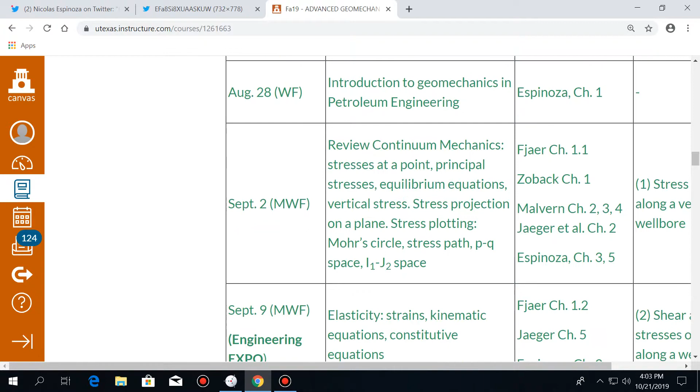Okay, let me talk about a few things in order to get organized. Remember that we do not have a final exam in this class. Instead, we have a final project, okay? For that final project, you are required to do two things. First, you need to prepare an abstract, and let me get over here. So green means that we have already gone through that. You have to prepare an abstract about your final project. So at the end of the semester, you're going to have to make a presentation about this final project, but I don't want you to do that three days before the presentation. You should start thinking about that, and you should choose a project to work on. And I have a few more details about this.

The deadline is going to be November the 13th. And let's go over here. No, not there. If you go to Files, and then you go to Final Project, here you will find the guidelines about this project. Again, deadline is November 13th. And for now, for this day, I just ask you for the abstract, and then later, at the end of the semester, you're going to have to do a presentation, which is going to be about 10 slides. It's not very long, okay? All right.

I have some guidelines about how to write an abstract, and I'd like you to write this abstract as if it were a paper, a conference or a journal paper. And you know, there are some basic questions that you have to answer in the abstract, like just a broad introduction about the problem. For example, if we were to write an abstract about Dr. Hertz's presentation, we'd say something like, hydraulic fracturing has become very important for petroleum engineering in the last three decades, something like that.

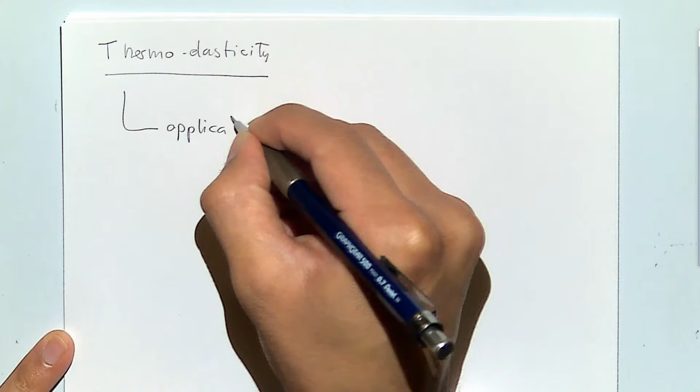And in order to solve problems of geomechanics including variations of temperature, we need to understand thermoelasticity. This is going to have several applications, probably one of the most important being geothermal energy, where there is a lot of effort now being done.

The Department of Energy started investing in hydraulic fracturing more or less in the 80s, trying to produce hydrocarbons from tight reservoirs. It took significant time for that to take off, but now it's very important.

The Department of Energy is also spending significant resources into understanding geothermal energy better. For geothermal energy, some of the rocks are very tight too, so they also require hydraulic fracturing. In geothermal energy, when you do hydraulic fracturing and injection of fluids, it's very important to know what the variation of stress will be due to variation of temperature of the host rock.

There are two types of geothermal energy: shallow and deep. The one we are interested in mostly in petroleum engineering, in terms of producing significant amounts of energy—not just for a few houses but for an entire city—is deep geothermal energy.

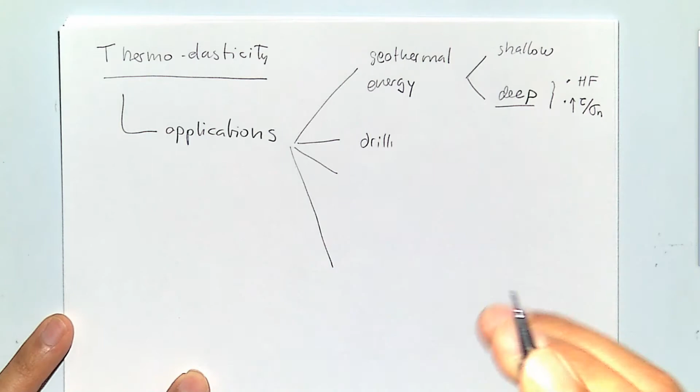Thermoelasticity is also important for drilling applications. When you drill a wellbore, you're using mud, which is usually at surface temperature, and it depends where you are what the temperature of the mud will be. Depending on how deep the wellbore is, the mud will take on more or less temperature as it goes down. But in many applications, that mud will have a lower temperature than the formation itself.

When that happens, you're cooling off the wellbore, and when you cool the wellbore, you can produce an increase of tensile stresses around the wellbore. We'll get back to this. But basically, your hoop stress, because the rock is shrinking, is going to decrease.

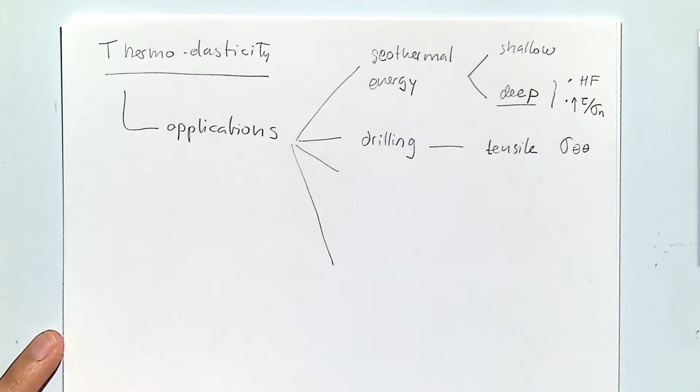There are some examples in which you are drilling a wellbore, and the wellbore is perfectly stable with a given mud at a given temperature. But then you go and do a pass of a logging tool, and some logging tools require the temperature to be a certain value, because otherwise some sensors will not work well. So when you change the wellbore mud, and if you put in a cooler mud, you may trigger tensile fractures, and your wellbore may not be stable anymore—just because of the effect of temperature.

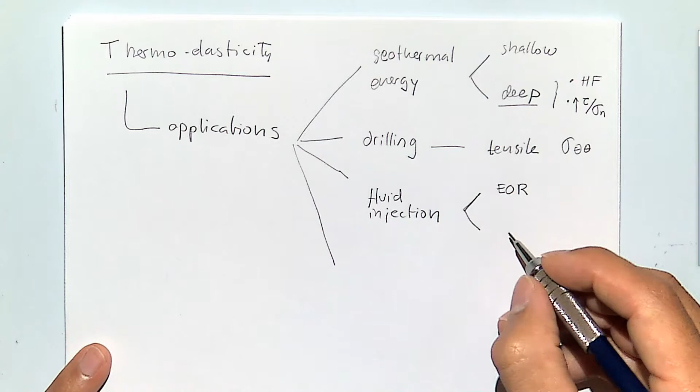This is also going to be very important for fluid injection, in applications like EOR or other pure injection cases. Usually you're also injecting fluids that are at surface temperature into a formation that may have a higher temperature. If you inject fluid into a formation with a higher temperature, you should expect the stresses to change because of the change of temperature.

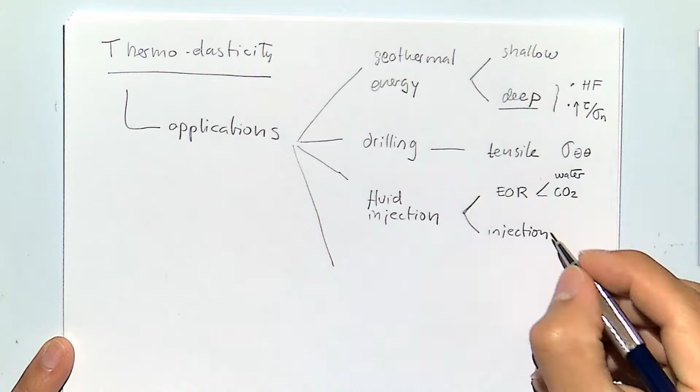This happens with water, but for example, I worked with a student on injection of carbon dioxide for EOR and also for disposal, in which, depending on the temperature of your injectant, you may have more or less variation of in-situ stresses that could help some hydraulic fractures to propagate. We're going to see an example about that later on as we get to the end of thermoelasticity.

But again, here you could also have water, or you could have chemicals. The issue is always what would happen with the contrast in temperature between what you inject and the reservoir temperature.

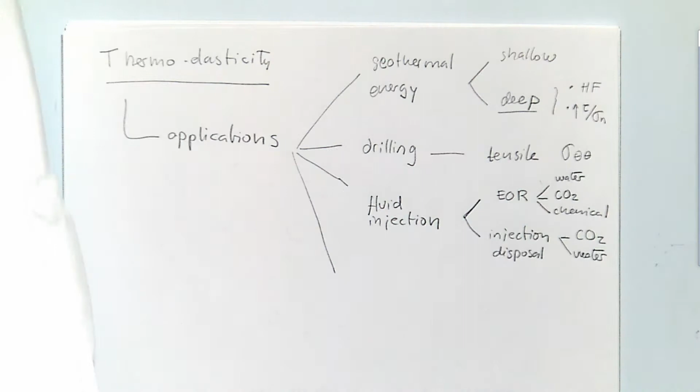Can anyone give me an example in which your injectant has a higher temperature than the formation? Well, but I mean for engineering purposes. Oh, okay, yeah, that would be a natural case. Is it SAGD, like in Canada?

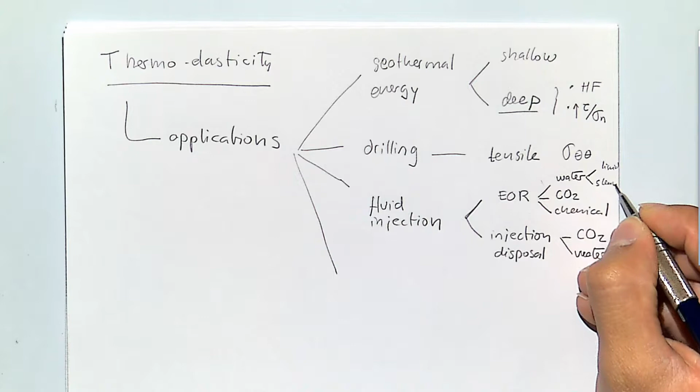Very well. What do you inject? High temperature water—and sometimes also steam. You inject water in vapor phase, and the temperature can be very high, 200°C, 300°C, and sometimes a lot higher than the reservoir temperature, and that is going to cause the opposite effect.

It's going to cause the rock and the fluids inside to dilate. Sometimes the dilation of those fluids, if under undrained conditions where the pore pressure cannot dissipate, will increase the pore pressure, and that lower effective stress will trigger shear fractures.

Can you repeat that one more time? So when you inject a very hot fluid like steam, you're going to heat up everything in the rock—the solids and the fluids. But especially if the fluids undergo a very large temperature change, they may go into the vapor phase, and as they do, they occupy more volume.

They occupy more volume, but you dissipate that increase of pore pressure because you need more space in order to have more volume. But if you don't have that space, pressure is going to increase. Pore pressure is going to increase. And if pore pressure increases, your effective stresses are going to go down, assuming that your total stresses are not changing.

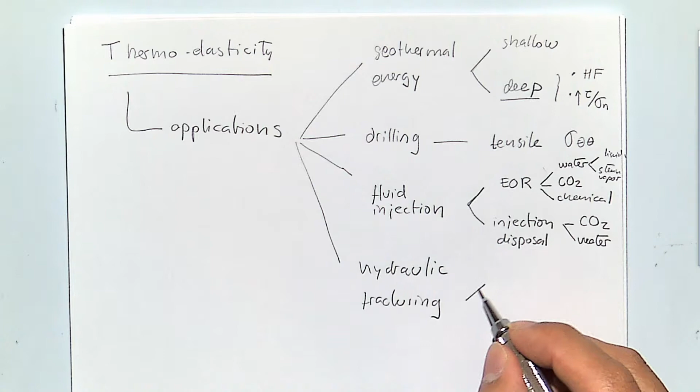All right, and I have a question now for you. Would you inject a hot fluid? Let's just restrict this to unconventionals, and with the unconventionals, I mean tight formations, like a shale. Would you inject a hot fluid or a cold fluid in order to have more, let's say, fracture propagation?

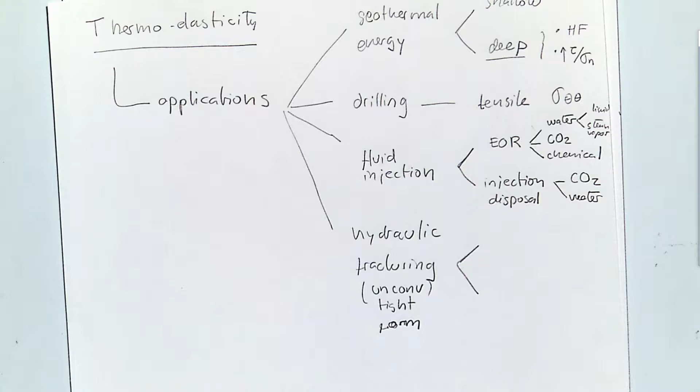Cold? Fracture propagation? Fracture propagation. You know, as we saw in the seminar before, many times you want to increase the complexity of your fracture to have more surface area and to help the fluids to go into the wellbore more easily. So would you inject a cold fluid or a hot fluid?

Okay, let's go with the cold one. Why? Because tensile failure, and you can get profit in something that's opening like that. The colder the fluid, the more contraction you will induce in the formation, and that sometimes can cause additional tensile fractures in addition to the ones that you're causing with the fluid.

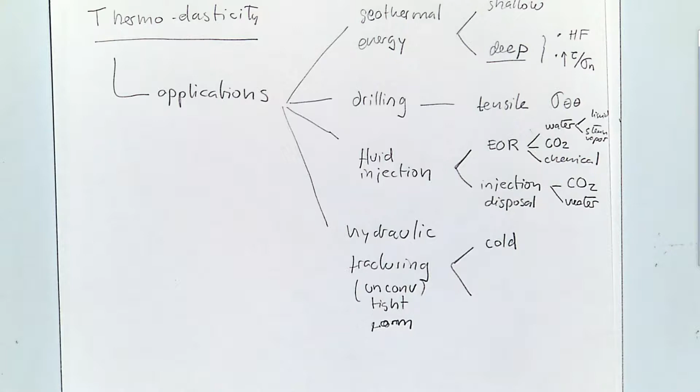There is actually a project that some people have proposed to do cryogenic fracturing. Basically, what you do in this case is you inject liquid nitrogen as a fracturing fluid at very low temperatures so that you can lower the temperature of the formation, and that can help fractures to propagate.

The problem with that is that there is a finite heat capacity of that fluid to cool the rock. So it does help, but the question is, how much?

And although by propagating a fracture by pressure, you have almost, let's say, an infinite source of power on surface on your pumps, when you inject a cold fluid, all the budget of energy that you have in temperature is the heat capacity of your fluid. That's it.

So some people have tried and argue that this can help hydraulic fracturing. It does help. The question is, how much, and again, if it is economical or not. But it does help hydraulic fracturing.

Can you explain that cold fluid is more contraction? We'll go into equations right after this introduction, and we'll see how that happens. But for now, let's just keep it as the high-level introduction.

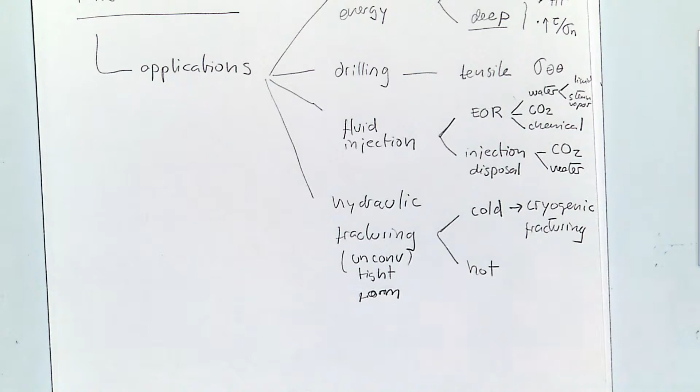And let's go with the opposite. What about if you were to heat up the reservoir? We just mentioned that earlier. So what is going to be the consequence? But now this is going to be an unconventional, right?

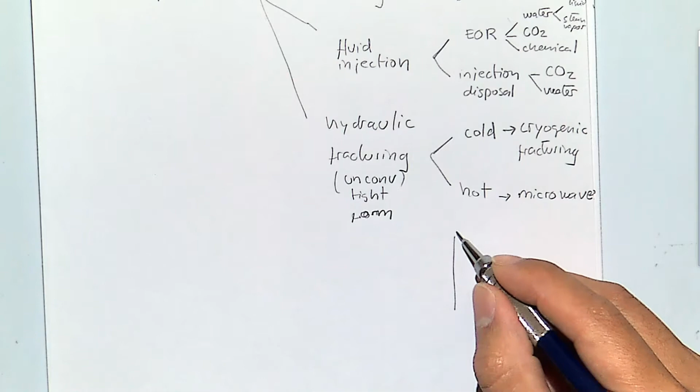And in this case, there are some people that have proposed to microwave the formation. So you heat it up with radiation, and the objective is that if you have a rock with water in the pores, as you heat it up with a microwave, you're going to increase the temperature of the fluid molecules.

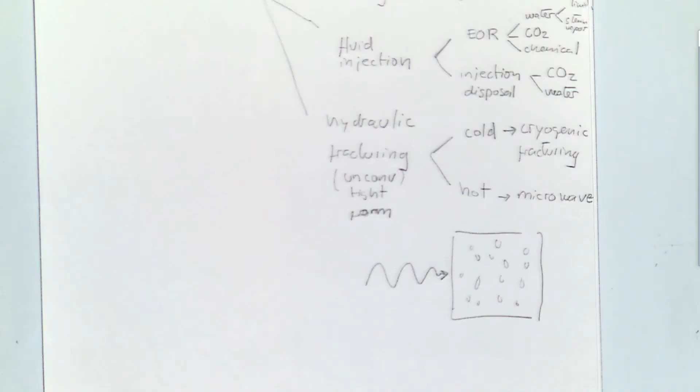Those fluid molecules may go into, I don't have blue color, they may go from the liquid phase into a vapor phase, and as they do, again, they will try to expand. If the permeability of the rock is low, the fluid cannot go anywhere, and if the fluid cannot go anywhere, that means that your pressure is going to increase. And this is again undrained loading, because the fluid is not going anywhere.

It's just changing phase, and as it changes phase, its pressure is increasing. And when it does that, the argument here is that you could create some fractures out of these pores and create microfracturing that is going to increase the matrix permeability of the rock.

I'm not sure, there have been some field trials of this, but people from Aramco Services were pushing this idea. Again, one of the problems is how to get all that energy further away from the formation. Probably with this method, you can heat up very well the near wellbore region, but getting further away, it's very difficult.

Similar to this, it's a process of undrained loading with source rocks. When organic matter transforms into oil and gas, usually also you require more volume for the same mass, and also that can crack some pores in unconventionals when they are forming, which is similar to this, but in this case will be caused by radiation and increases of temperature.

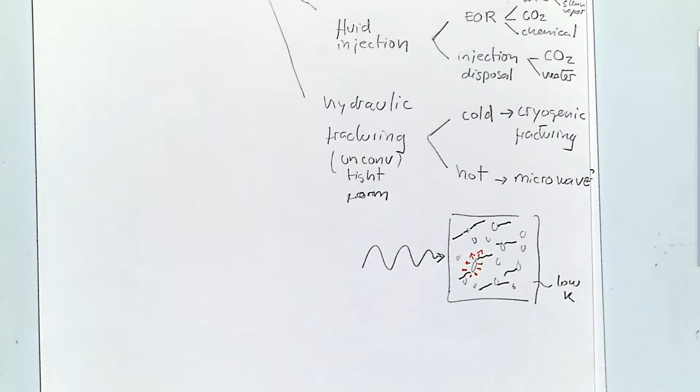You had a question, Bethany? I was just wondering, after someone creates microfractures like this, would that then be fractured later on to connect them to a wider network? Because otherwise I feel like they would just... That would be the idea.

Probably what I would do is heat it up first to increase the pressure everywhere, and then fracture it. But I don't know exactly what these guys were doing.

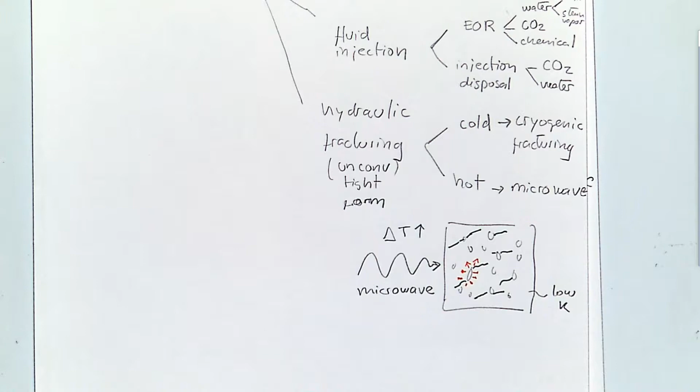How would microwaves affect your oil or your gas? I'm not sure. Could you crack it? Well, that's a project. There are many people interested in helping oil and gas get produced from immature oil shales, that aren't quite in the range of producing oil and gas, by helping them generate oil and gas. So you could do that, and I know some companies are interested in that. But again, is that economical? It can be done, but is it economical or not?

That's another question. So you could do this experiment. Let me see if we find something on YouTube, because this can be easily done if you put a rock in a microwave and heat it up.

All right, so first of all, don't do this at home, Stephanie. You might break your microwave.

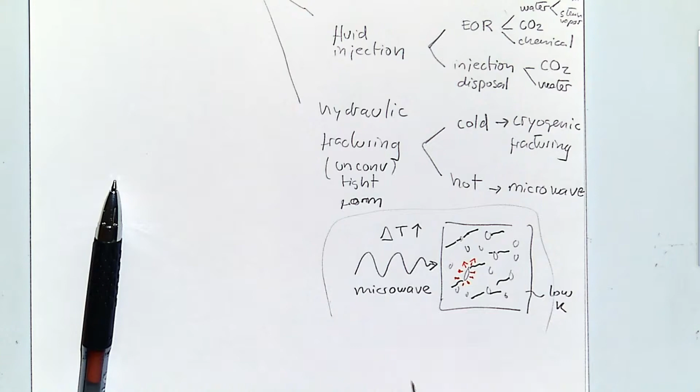So the underlying concept in all of these processes is that if we have a positive change of temperature, we're going to call that a dilation.

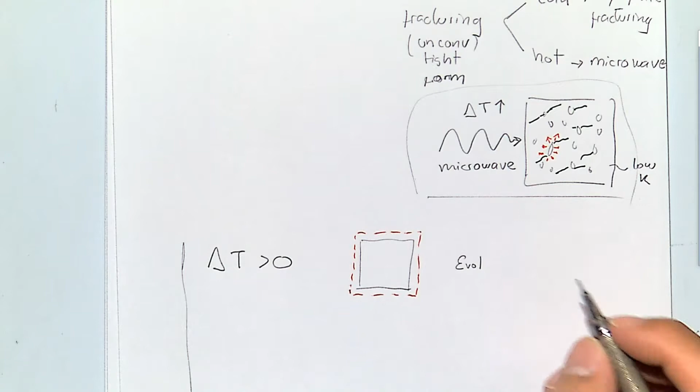And in this case, the volumetric strain, or as we were calling it also in poroelasticity, this epsilon is going to be less than 0. It's going to be a negative value, and we're going to call this dilation.

I thought dilation has something to do with shear. No, it's in general dilation. Like, for example, we're going to see that in thermoelasticity we need a coefficient of linear dilation, which tells you how much the rock expands with a change of temperature. If we have a decrease of temperature, usually we'll see that rocks will tend to shrink.

And in this case, the volumetric strain is going to be higher than 0, and then we'll call this a contraction. And we're going to go under the assumption that either if you have a change of temperature which is positive or negative, we have no shear strains.

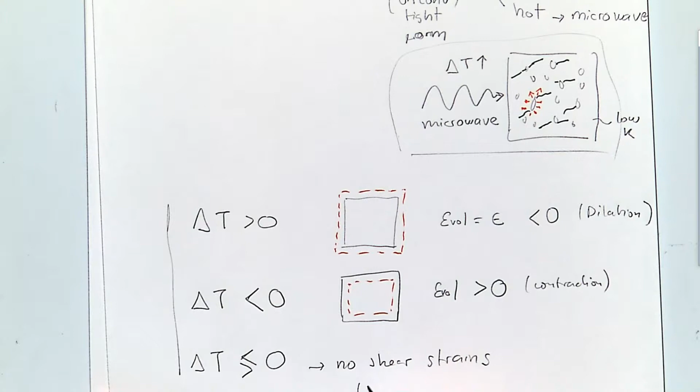And this kind of makes sense, but it makes sense only in an isotropic material. And a lot of our theory is limited to isotropic materials. We're not going through the anisotropic materials. We did a little bit for elasticity, but remember that real rocks are not isotropic, are not homogeneous, and therefore some of the things that we are taking as theory, they are a simplification.

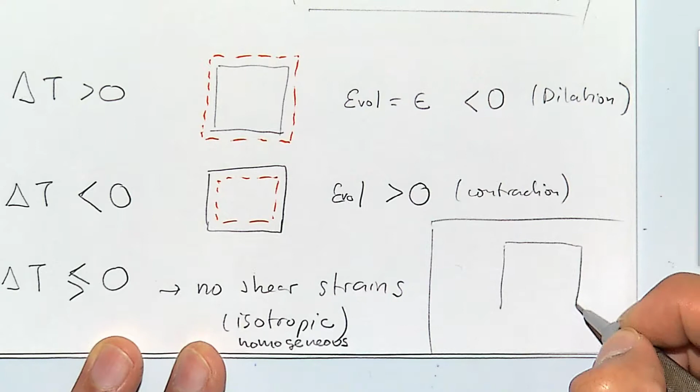And just as an example, let's see what the importance of isotropy and also homogeneity is. Okay, let's say that we have a rock which is layered, and the layers have a different coefficient of thermal dilation, which means that, let's say you increase 10 degrees C, and one rock is going to expand more than the other. What is going to be the effect of that?

Do you think you can create shear stresses? Why, Stephanie? Because one contracts or dilates more than the other. And where would you get those shear stresses? At the layer boundaries, right? So this will look something like this. One expands, but another one expands more than the other.

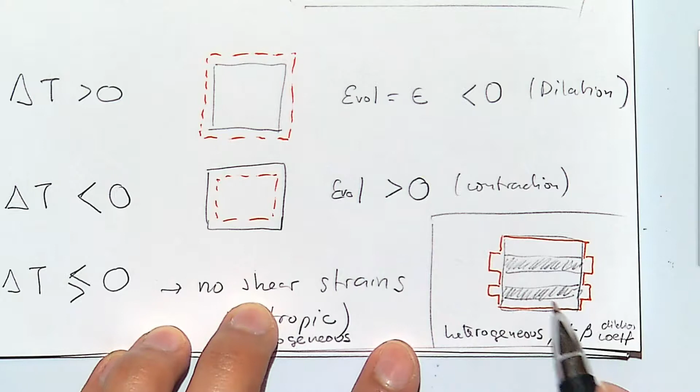And in order to be compatible in terms of deformation, you're going to generate stress at the interface. In this case, we're assuming that the rock is not breaking, you're generating stresses, but if the shear stress is higher than the bonding shear stress, then that's going to break. So in this case, you are creating shear stresses with changes of temperature. But if your material is isotropic and homogeneous, you will not have that.

What you are showing over there is stress and not strain. It's stress and strain at the same time, because I'm showing the deformed configuration of this. So probably, if you want, we could do this. It could be smoother, meaning that it didn't break yet.

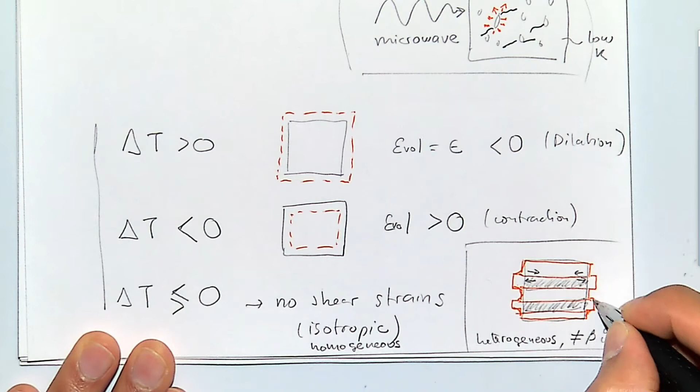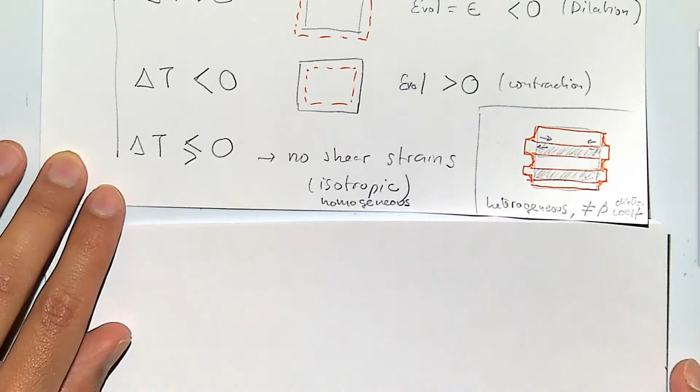Dilation coefficient? Yes, beta is the dilation coefficient. That's what we're going to see right now. All right, so we need to put this into equations, okay? Because we want to solve these problems, and ideally we want to put them in a simulator or into some sort of model that allows us to quantify what these changes of temperature are going to produce in terms of stresses. And in order to do that, what we need to do is modify the constitutive equation in order to add the thermal part.

What is the constitutive equation for linear elasticity? You should know this very well. The C matrix times strain. All right, so what we're going to do is take that constitutive equation, which tells us the stresses as a function of strains and properties of the material, and now we're going to add a component that tells us the influence on stresses of changes of temperature.

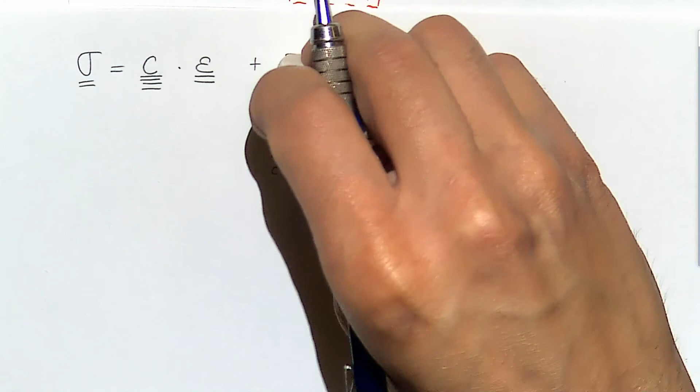And I forgot one thing. Let me add it, let me move it a little bit: 3 beta, and here K is the bulk modulus. All right, so you can either show this equation by doing the examples that we're going to do now, or we're going to do the opposite: I propose equations, and we verify that they make sense.

For the changing temperature, what units? Kelvin? It depends how you define your beta. So notice that here we have stresses, units of pressure. We have K, units of pressure. So if this is, let's say, centigrade, this must be 1 over centigrade. If this is Fahrenheit, this must be 1 over Fahrenheit.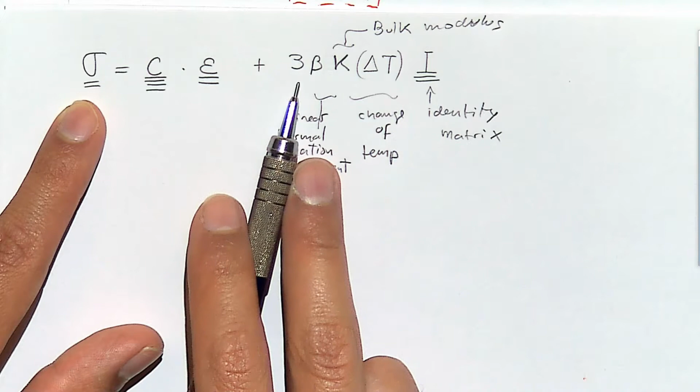Okay? All right, so let's see some examples that are going to help us understand what we have now in this new constitutive equation. And let me just clarify also that we don't have pore pressure in here. You can use this equation whenever the pore pressures are very small, or whenever you don't have any porosity and fluid in the pores. But we just go with the thermoelastic part. We'll add porosity later on.

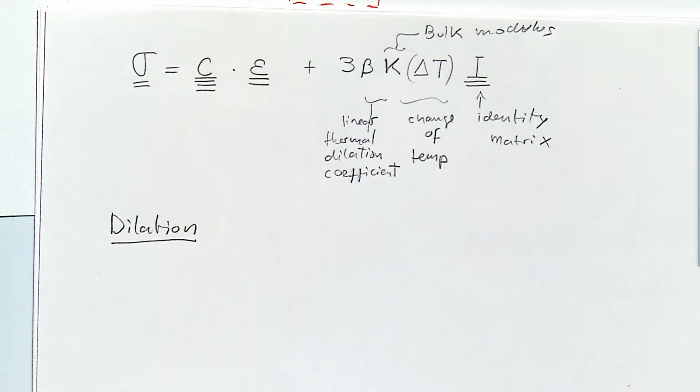All right. And this is assuming isotropic. Yes, because we're assuming that in the 3 directions, the thermal dilation coefficient is the same. So this is an isotropic material. You could have materials with anisotropy, and this beta, instead of being just one scalar number, will be a tensor.

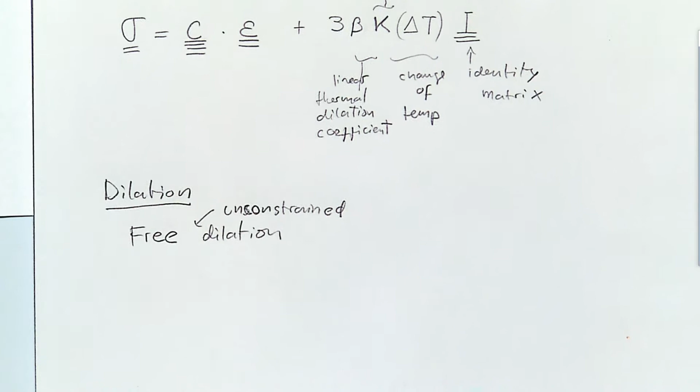All right, so let's go with an example of dilation. In this example, we're going to say this is free dilation, or we could also call it unconstrained dilation. Basically, we don't have any stresses. We're just heating up a rock by increasing temperature. So if we don't have any stress at all, then in this equation, the stress is going to be 0, and therefore this is going to be 0.

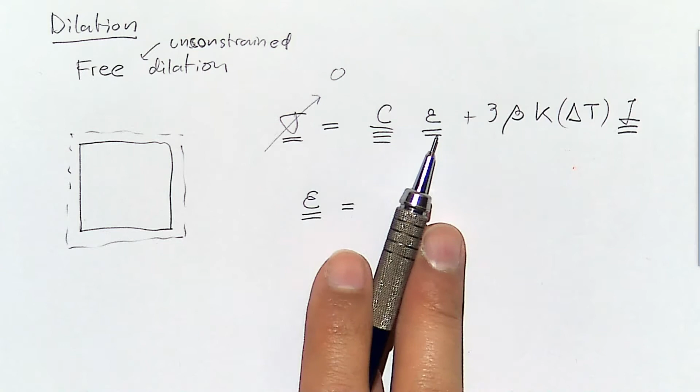And from here, the only thing I have to do is calculate the strain tensor. If I move this to the other side and multiply the inverse of the C matrix to the left, then I just get strain, and the inverse of the C matrix is just going to be the compliance matrix times this. And let's write this now not in terms of matrices, but as a vector.

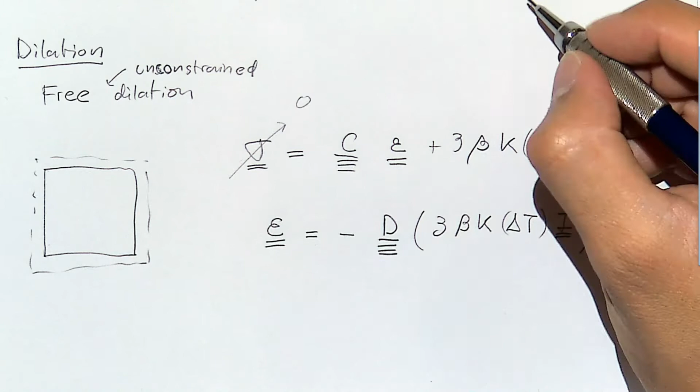I need to clarify one thing before I move on. Notice that we have an identity matrix, all right? This means two things. That it is isotropic, so the beta goes the same in all directions, and also no shear components. So the shear stresses are not going to be affected by changes of temperature because I have an identity matrix here.

And the stresses are going to be affected all the same in all three directions because this is an identity matrix, basically 1, 1, 1 in the diagonal and zeros everywhere else. So the identity matrix is telling us that we have an isotropic material and no shear components. Because of that, now I can just pay attention to the elements in the diagonal, and these are going to be equal to the compliance matrix of an isotropic material times the number that comes right from here.

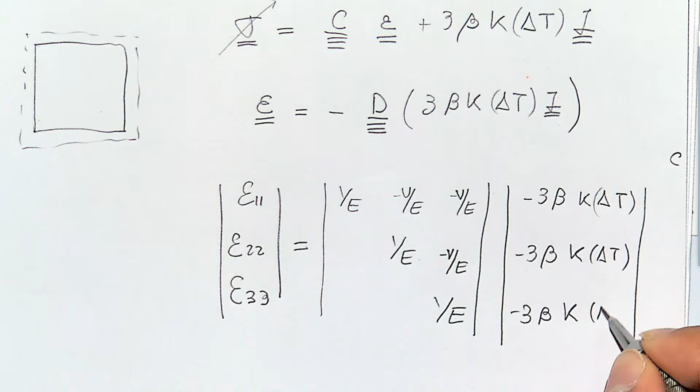I could write the identity matrix, or since I wrote it as a vector over here, this one is also going to be a vector, and this is going to be 3 beta K delta T. Each of these strains is going to be the same, but let's just solve for one. It's going to be 1 minus 2 times Poisson ratio divided by Young modulus, times 3 beta K delta T.

And from here, let me get the negative sign over here. Does anyone recognize the term in between the dashed line, without the negative sign? The bulk modulus, right? Yeah. So this is actually K. Let me write it over here. So K divided by K is 1, and this is just beta delta T. So each of those strains is just the coefficient of linear expansion times the change of temperature.

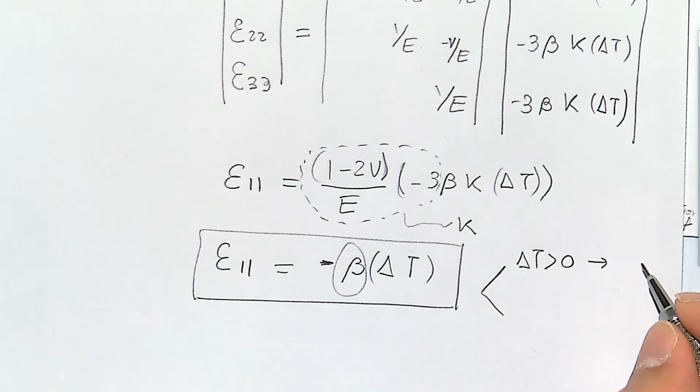I don't remember if I wrote this one. Yeah, I wrote that before, the linear thermal dilation coefficient, right? So if I have a positive change of temperature, positive times positive, and here I have a negative sign, that's going to give us a negative change of strain, which means a dilation. Wait, let me say it again. If I have a positive change of temperature, I'm going to have a dilation. If I have a negative change of temperature, I'm going to have a contraction.

Let me be consistent with this. Positive change of temperature, negative change of temperature, I get confused with the words. But the first one is dilation, negative. The second one is contraction, positive. Because remember, we're assuming that contraction is positive, compression is positive. We are working with a geomechanical convention, not with a poroelasticity convention.

Okay. Well, now that we know this, it would be interesting to get to know some more or less real values of this coefficient. This coefficient is defined in a way that it should be a positive number because it's a property. And it's usually in the range of 10 to the minus 6 to 10 to the minus 5, 1 over Kelvin. And this is the same as 1 over centigrade. But it's not the same as 1 over Fahrenheit, okay? But in K or in centigrade, it's going to be the same.

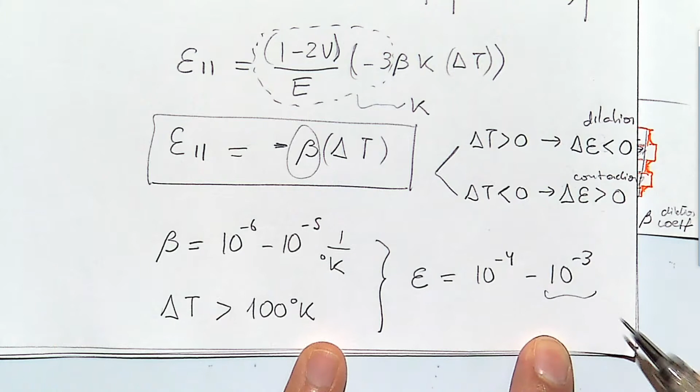I don't know if you remember when we were making these models about tectonic strains. Tectonic strain was a few thousandths, was very small in order to produce a large stress. When you run experiments in the laboratory, also strains are relatively small in order to produce large stresses. And of course, it depends also on the stiffness of your rock. The stiffer the rock, the smaller the strains you need to produce a large stress.

Let me see if I find an example here. Probably here. I want a real example. No. Let me see the next one. I remember I had one.

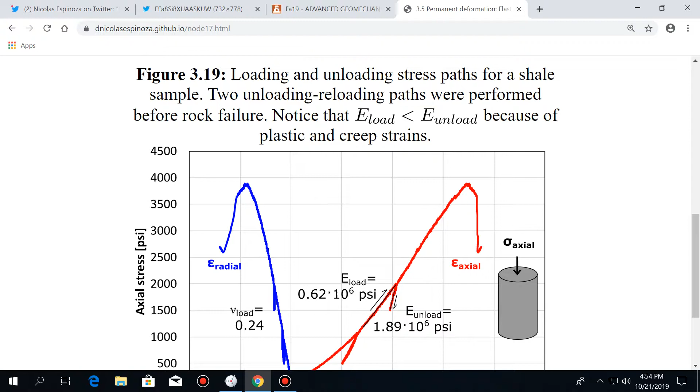Okay, here. So here you have an example of shale. And you see that the strains are in the order of thousandths to produce stresses in the order of several thousand psi. And for this type of rock, if you have stress in the order of 1,000 and strain in the order of 1 over 1,000, then the Young modulus or the stiffness modulus is close to 1,000,000 psi. 1,000 divided by 1 over 1,000 gives you 1 million.

And what we just saw is that for strains in the order of thousandths caused by a very large change in temperature, we could have stresses in the order of 1,000 psi or so, which are relatively large. And that's what we're going to do now. So changes of temperature in typical rocks are going to depend just on the dilation coefficient, and they could be as large as a few thousandths. Strain. The strain is unitless, and it's going to be in the order, let me write it because it's very difficult to say for me, of thousandths, right? 1 over 1,000.

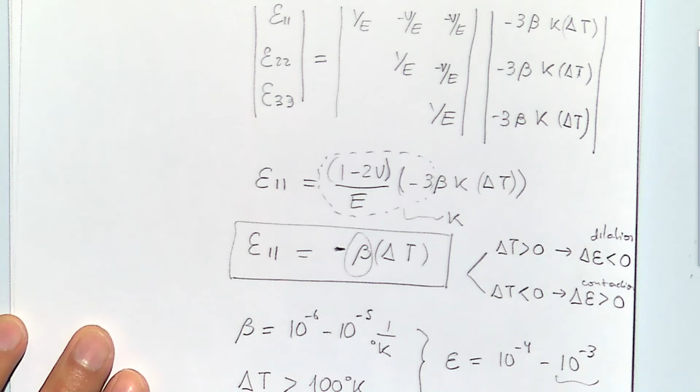All right. This was an example of dilation. And notice that dilation is independent of the Young modulus. It just depends on the linear dilation coefficient of the material. All right, and for typical rocks, it is this number. Well, let's see the other side of the same phenomenon, which is constrained dilation. In constrained dilation, we increase the temperature, but as we increase the temperature, we do not let the rock expand.

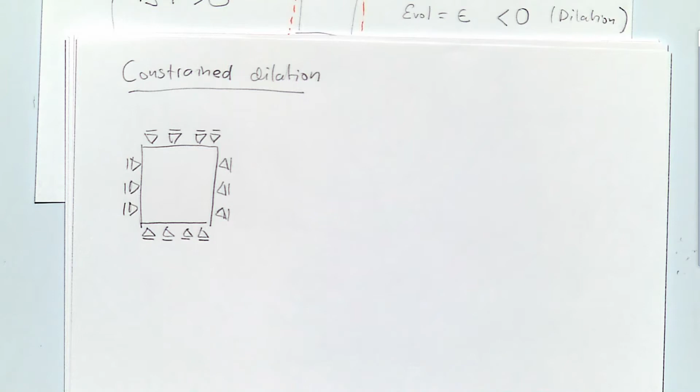I remember now this was one of the issues, at least from my point of view, with heating up a reservoir with high temperature, which is that you can blow up a rock in a microwave on surface without any stresses, but it's not going to be the same in the subsurface because it's going to be subjected to stresses and to a confined condition in which the rock may try to dilate, but if the expansion is constrained, it's just going to build up stresses. And it's not going to blow up. It's just going to have increased stresses if you do not let it dilate.

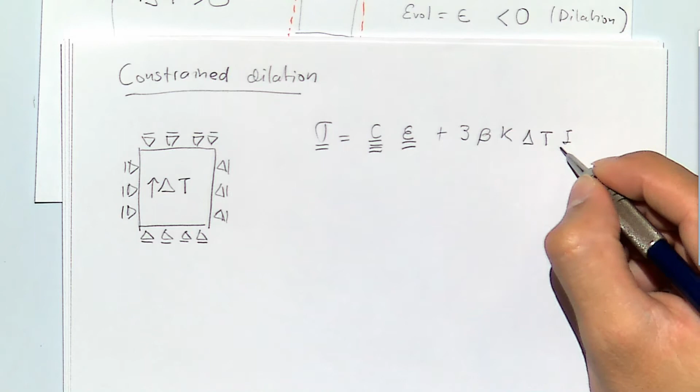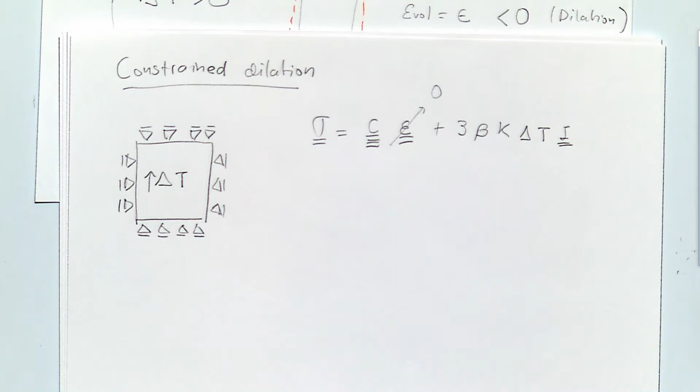So we increase the temperature here, we heat it up, and let's see what happens with the equation. Same equation that we used before. Which term is going to be 0 now? If we mean constrained dilation, that means no strains. So this one is going to be 0. And we get straightforward out of this equation that, remember, shear stresses are going to be 0 because we have an identity matrix here. So I'm going to simplify this to the vector form of this stress tensor.

And this is just going to be 3 beta K delta T times identity matrix. That's it. And let me add the sign. In all directions, then we're going to have an increase of stress, which is going to be just 3 beta K delta T, where K is the bulk modulus. And now we do have the bulk modulus. For a particular stress in one direction, this is going to be the result.

And let's say for a typical bulk modulus of a rock, this is more or less a stiff rock, but there are stiffer rocks, of 10 gigapascals. And let's say a delta T of 100 degrees C or 100 degrees K, which is the same thing. Let's do it in K, since we were using K before.

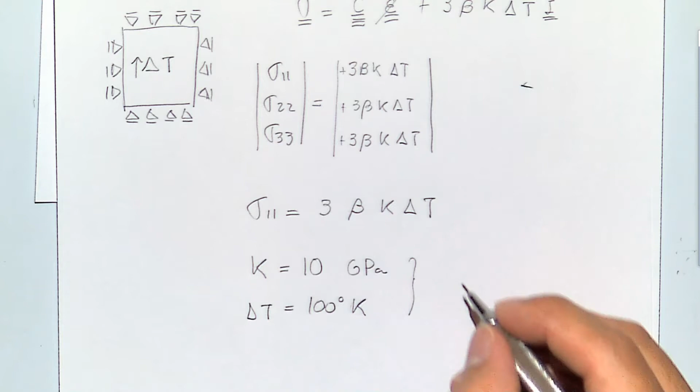What is going to be the induced stress? And let's remember that we said let's use a high beta, just to make this a little bit more dramatic, of 10 to the minus 5, 1 over K. So sigma 1,1 then is going to be 3 beta, 10 to the minus 5, 1 over K. And the K is 10 gigapascals, which is 10 to the 10 pascals

times 100 C. Let me, I don't like to break equations, so let me write this again. But you should try to fit all of that in one line. All right, so 3, 10 to the minus 5, 1 over K, 10 to the 10 pascals, and 100 K. So K with the K goes.

And what is sigma 1,1? Minus 5 plus 10 is going to be 5. So that's going to be 3 times 10 to the 5, right? And that's going to be equal to 30. Okay, let me see if this is correct. So 10 gigapascals is 10 to the 10 pascals, right? What about the 100? Oh, the 100. So seven, that's why my number was 10 to the 5. So it's 10 to the 7,

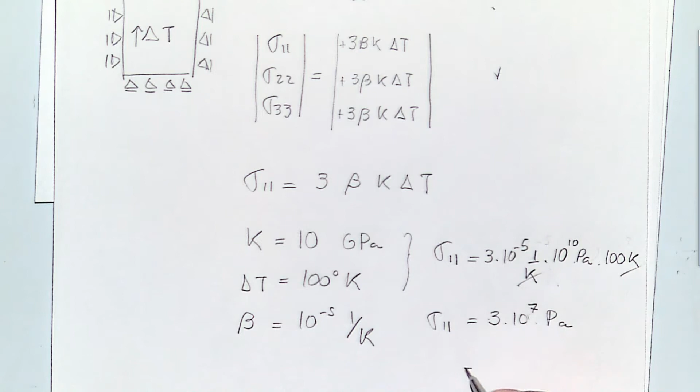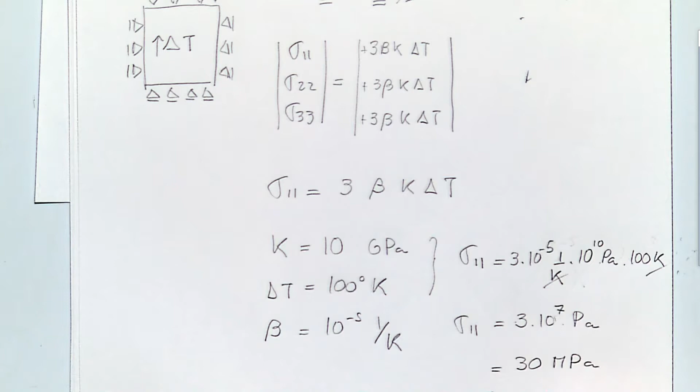which is equal to 30 MPa, which is equal to, more or less, if I remember correctly, 30 times 145, and that will be equal to more or less 4,400 psi. So that looks like a huge stress to me. So we're generating thousands of psi by increasing the temperature and not letting the rock expand.

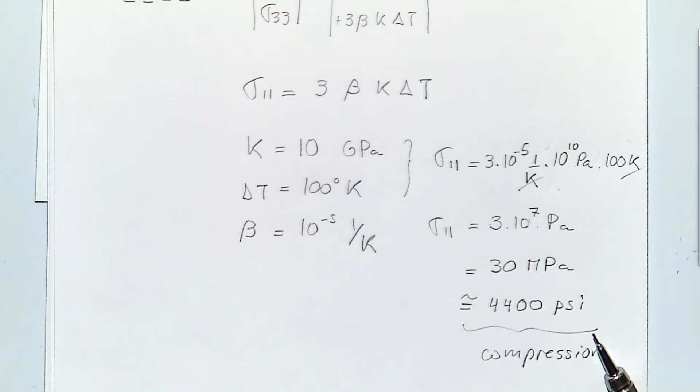And also from the signs, remember, if we heat it up, positive change of temperature, and not let it expand freely, this is going to be a compression. If you lower the temperature, this is going to be a tension. What is a typical tensile strength of a rock? About how much? Let's say a very tough rock. What is its tensile strength? 5 what? 5 megapascals. Does everyone agree with Stephanie?

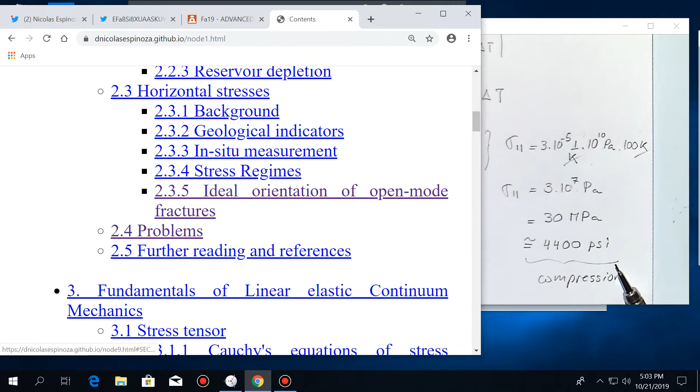Okay, let's look up over here. I remember the numbers, but I just want to show that so you believe me. Tensile failure. Typical tensile strength of rocks is in the order of 5 megapascals. And there are some rocks which are very strong, especially metamorphic and igneous rocks, over 10 megapascals, but usually not a lot higher. And there are some other rocks that have no tensile strength at all, and some others that have a limited tensile strength. But the Berea sandstone that we were testing here has a few megapascals of tensile strength.

So to me, this stress with a very large change of temperature is going to be enough to produce tensile failure. And actually, in some of the research I was doing on injection of carbon dioxide, you do get changes of 100 C. For example, if you were to inject a fluid which is on the surface near Arctic regions with temperatures below 0 into a very hot formation with a temperature in the order of 100 or more, there you have a change of 100 degrees C. More often it's going to be less, right? But it's not unreasonable to think of a change of 100 degrees C.

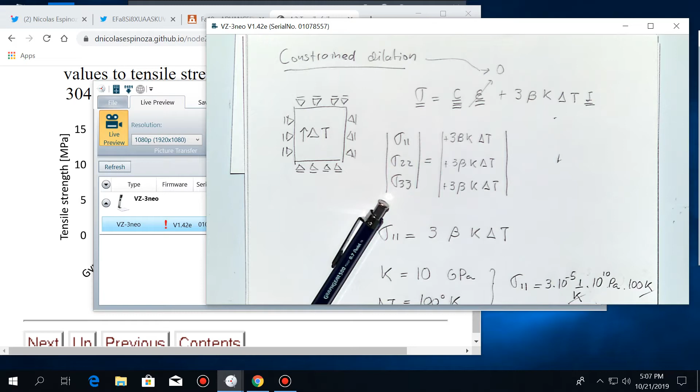If you had a fluid, then your effective stress may change with time. It may go from low effective stress to high effective stress as the pore pressure dissipates with time. But in this case, we're just talking about a solid without pores. When you add the fluid part, it gets a little bit more complicated. Well, but the data you showed are solids with pores, right? Yeah, that's real data. Here we are creating a simplified model. But the same thing will hold in terms of effective stresses. So here I'm comparing effective stresses to the effective stresses that cause tensile failure.

Yes, Stephanie. Aren't rocks poor thermal conductors? So if you're increasing temperature through something like a frac, on what scale is that temperature difference actually penetrating the rock?

That's a very good question. The answer is that usually the front of temperature is a lot shorter than the front of fluid invasion. It would depend on the permeability of your rock. But way ahead from the fracture, you're going to see changes of pressure because of the injection of the fluid. After that, you will see the injected fluid into the pores of the rock.

And after that, you will see the front of change of temperature. So that's one of the limitations we were saying with this cryogenic fracking - it doesn't go far from the point in which you start changing the temperature. And that's going to be related to the diffusivity parameter of the rock, which controls how much temperature changes with time.

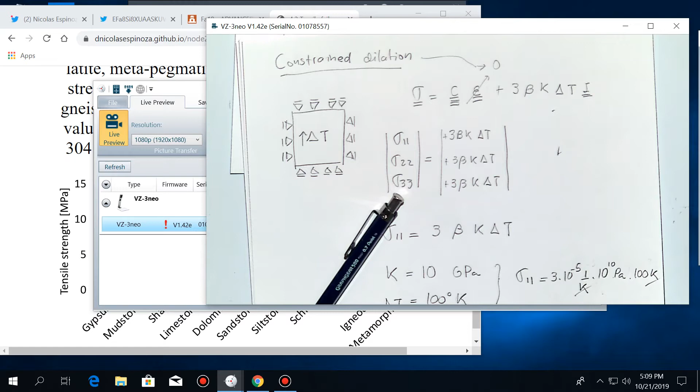Okay, so now that we have the basics of thermoelasticity, we can apply this to my favorite example - do you think which one that is? We're going to apply it to more or less a real condition. What boundary conditions are the closest?

Very simple, still very simple, but closer to actual conditions. Which one? Oh yeah, the uniaxial strain - so the 1D strain case.

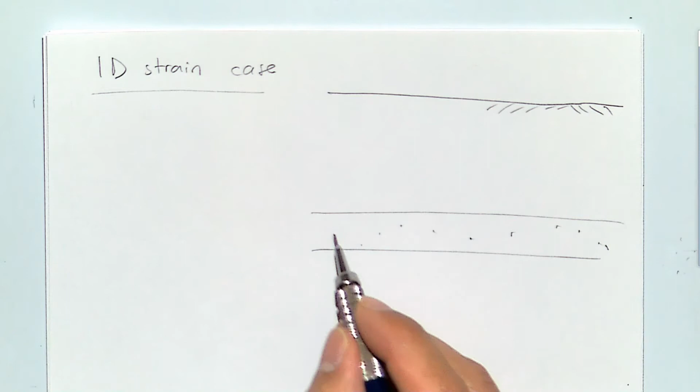And for this uniaxial strain case, again we have rock which is in the subsurface. There is more rock around it in both horizontal directions. Let's say that we're planning to make an injection over here out of the vertical wellbore, and we want to know how much stress is going to change as a function of temperature.

Okay, so we'll start by writing the same equation that we wrote before - the constitutive equation. And I'm going to do a small change here so that I don't have to write this delta all the time. I'm going to call theta the delta T, equal to T minus the original temperature.

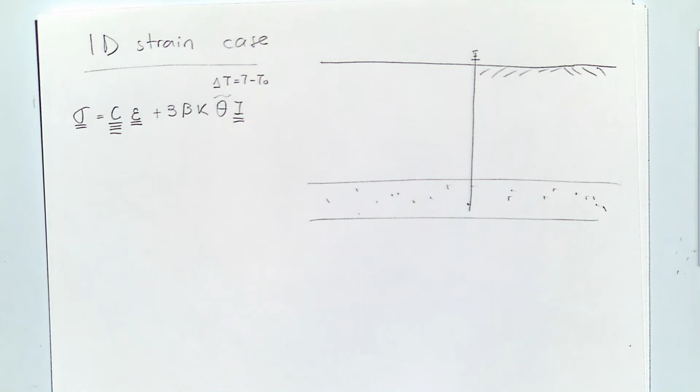All right, so let's start with this. We're going to write this equation in terms of effective stresses. And the same thing is going to apply for a porous solid in drained conditions, as far as when I'm injecting this fluid.

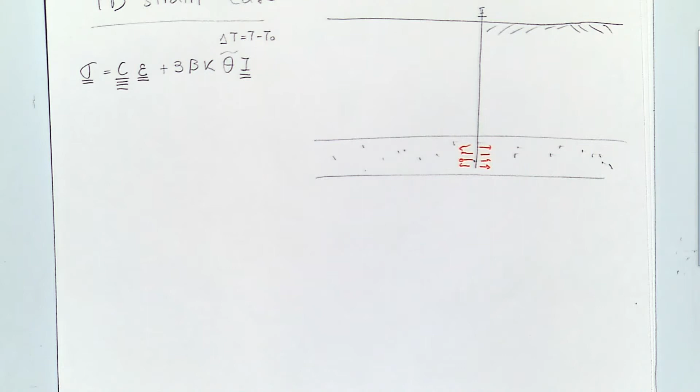I forgot also my red pen. But I'm injecting this fluid, which is cold, and the formation is relatively permeable so that the changes in pressure are negligible. All right, so let's start with the equation.

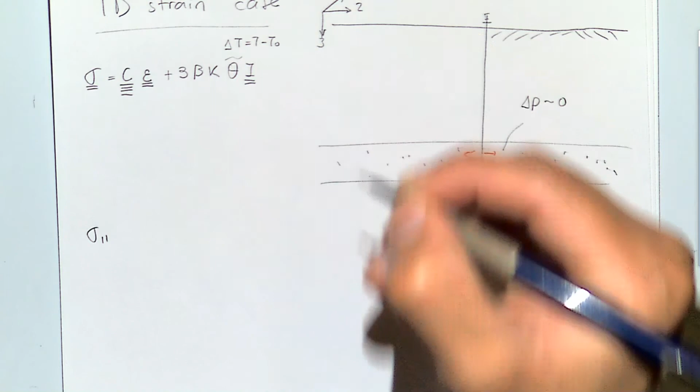Let me add a coordinate system over here. So I'm going to make this 1, 2, 3. So I have sigma 1,1, sigma 2,2, sigma 3,3. Here I have the stiffness matrix, and the stiffness matrix is this one.

Strains, and last we have the thermal components.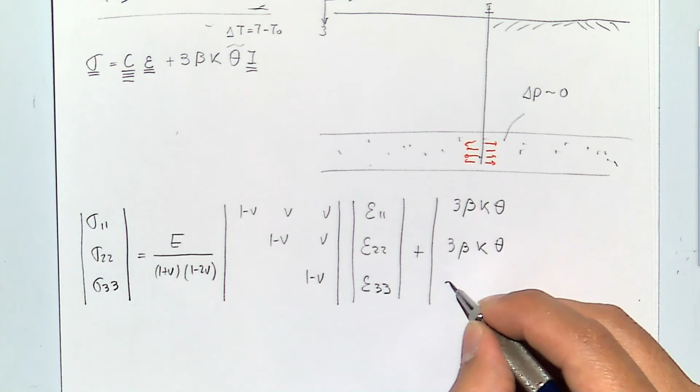All right, so let's start with the 1D condition. The one-dimensional condition means that I can have strains in direction 3, but I'm not going to have any strain in direction 1 or 2. And I'm saying that I'm injecting - the same equation is going to hold for either hot or cold, right?

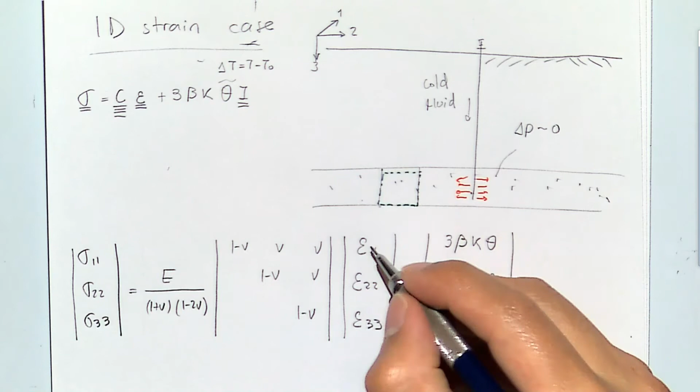But let's say that we inject a cold fluid, and therefore I would expect a contraction. If I have a contraction, the deformed configuration of the rock after some time is going to be a contraction just in direction 3, but not in direction 1 and not in direction 2. So this one will be 0, this one will be 0, and let's see how we work with those equations.

I'm going to assume something else over here, which is required. Because I assume that the overburden is constant and that there is also a very small change of pressure, which is negligible - those two together are going to imply that also sigma 3 is relatively constant, okay? So this one is going to be constant.

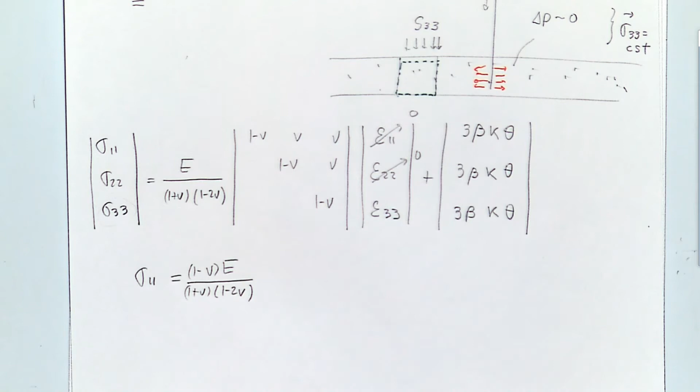All right, let's write equations for sigma 1 and sigma 2. So sigma 1 basically is this row times that, and you know these are 0, so this is just going to be 1 minus Poisson ratio, epsilon 3, plus 3 beta k theta. And sigma 2 is going to be the same, so I'm not going to write it.

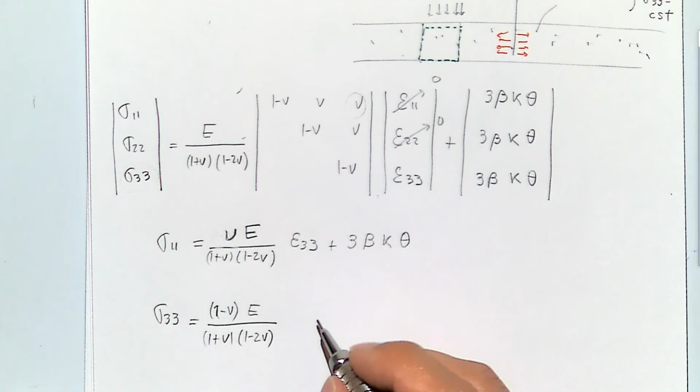Sigma 3 is going to be... wait, this first one is wrong, it's just Poisson ratio. I was somehow looking at the third row, but it's just Poisson ratio. And the third one is 1 minus Poisson ratio, modulus, 1 plus, 1 minus, epsilon 3 plus 3 beta k.

From here, what I want to do is use this equation into this other equation, so I get rid of epsilon 3, and therefore this is going to be 1 plus this, 1 minus that.

Epsilon 3 is going to be sigma 3 minus 3 beta k times that, all of that divided by this, and finally plus 3 beta k theta. This is the fun part, you get to simplify things, and they naturally disappear, and as you can see, we have sigma 3 over here and the 3 beta.

Let me see how we simplify this. We know this coefficient very well, so it's that one, sigma 3, plus — I think I don't forget anything — we have the 3 beta k. Yeah, I think this is correct, right?

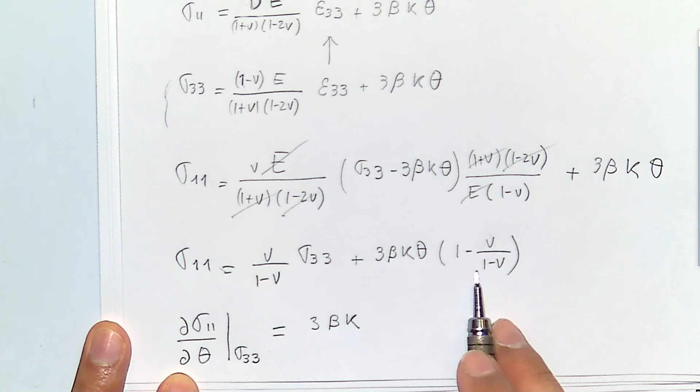This is going to be basically the partial derivative of this, and it's going to be 3 beta k, and if I go ahead and do this operation, it's going to be 1 minus 2, 1 minus Poisson ratio.

I'm going to go one more thing. Hopefully my equation is going to be right, I'm not copying what I have here, I'm going another route. And what was K, do you remember that? Okay, wait, isn't it 3bk minus everything in that parentheses? Don't you distribute it and then take the derivative? Yeah. So why wouldn't it be 3bk minus? No, but I'm already doing this thing over here.

K is Young's modulus divided by 3 times 1 minus 2 times the Poisson ratio, right? That's K. And this times 1 minus 2 Poisson ratio, over 1 minus Poisson ratio — and again, this is the fun part, it goes away — and I get that this is just beta, Young's modulus, over 1 minus Poisson ratio.

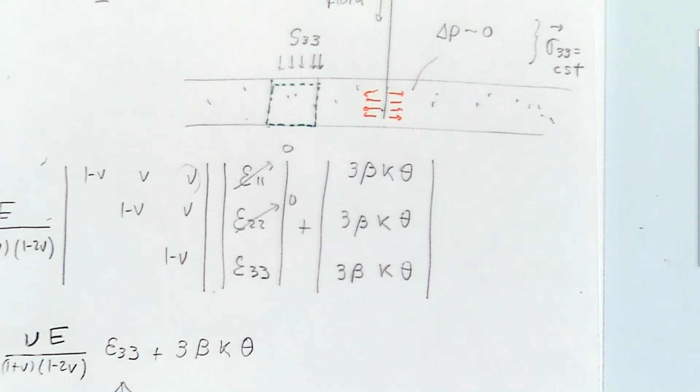So let's come back over here. If you have lower stresses caused by temperature, again, you may be injecting a fluid. At the beginning everything is fine, but then at some point when the rock starts to cool off, you may have a hydraulic fracture propagating. Also, because of the change of temperature, if your rock is shrinking, you could have a reactivation of a fault.

Because you're changing things — well, let me actually draw this reactivation. It's going to be probably limited to inside the reservoir. Because you're shrinking the rock in the horizontal direction, you're lowering the effective stress, the normal effective stress on the fault. If your shear stress is more or less the same, you have the risk of fault reactivation.

Because of the injection of this cold fluid, we have seen that we can lower the fracture gradient, and if that goes far enough, we can even cause some induced seismicity. This has been a big problem for geothermal energy.

In the field experiment in Switzerland, nobody knows yet what happened really, but I guess some people know, at least I don't. What was the main cause for the induced seismicity they observed? They were doing geothermal energy, pumping cold water, getting hot water out of the ground for producing electricity, but then they started to observe some induced seismicity and they stopped. Where does induced seismicity come from? Because of injection and increase of pore pressure, or reactivating a fault, or temperature reactivating faults. Nobody knows that very well.

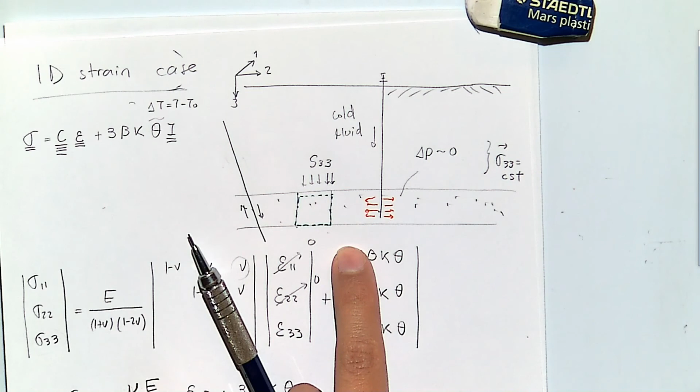So that would be something that we don't want to do, like large induced seismicity because of injecting cold fluids. At the same time, this is beneficial for geothermal energy whenever you are reactivating some small fractures, because in that case you have increased permeability near fractures that can help the cold fluids get into the matrix of the rock, suck the heat, and take it into another wellbore that is going to produce the hot water.

Jack, you had a question? So when we talk about induced seismicity, a lot of it occurs near the basement, so it's lower than the injection point. Yeah. And then here we only talk about the change in pressure with respect to sigma 1,1, that's horizontal. What about vertical?

Okay, well in this case we're assuming that the change of pressure is very small with respect to vertical, everywhere. So there are two parts in this injection problem: how much you change the pore pressure, and how much you change the temperature. For this particular problem, we're assuming the pressure change part is not that important. If we do that, we can derive all these equations that don't have pressure in them, but they are still valid for effective stress, because I'm assuming the changes of pressure are very small.

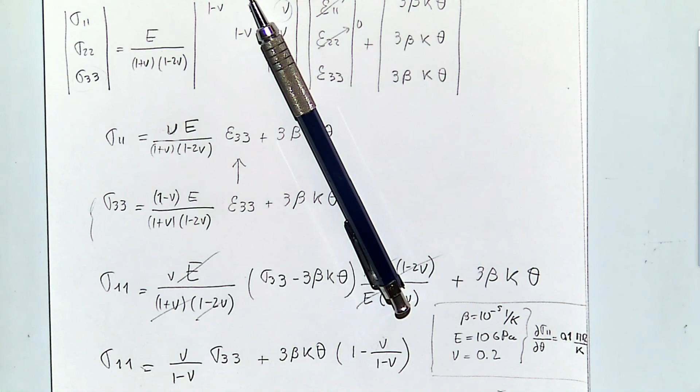I don't know if that answers your question, but I think you were asking about the variation of sigma 3,3. Well, in this case, since we're assuming that S33 is constant and it's just the overburden, temperature is not going to change the overburden.

So that's going to stay the same, as long as we consider that this is a very long layer. If you consider a more localized change of temperature, then you could create some arching effects near that localized point, but we're not exploring that right now. We're assuming we have a long reservoir with dimensions in the horizontal direction much larger than in the vertical direction.

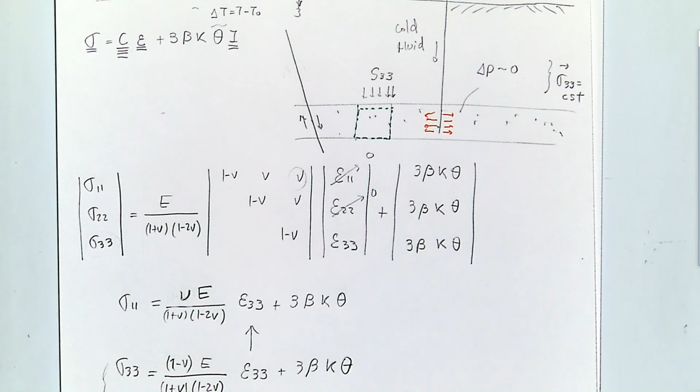So we make no limitations on the changes in S11 and S22, right? Because we have a trend in sigma 1,1, we would have a trend in S22 too. Yes. So we don't have any strains in direction 1 and 2, but we let temperature change the deformation in direction 3 anywhere. So if there is a contraction, the rock is just going to contract in direction 3, but not in 1 and 2.

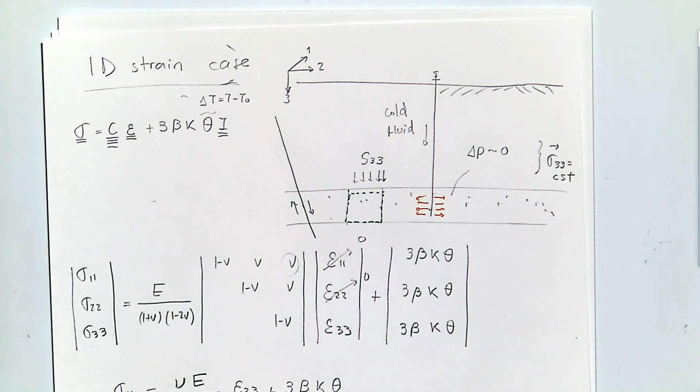And are we considering fluid in this case or no? Not directly, but indirectly, what is changing the temperature is the fluid. We're not assuming an impervious rock. There is permeability, fluid goes through, and fluid changes temperature.

As a result of that, the change of temperature localizes in this layer. But we're saying the change of pressure is so small, let's say 0.1 MPa, that compared to the changes of stress we see because of the change of temperature, we just disregard those. We said they could be as large as, for example, 10 megapascals.